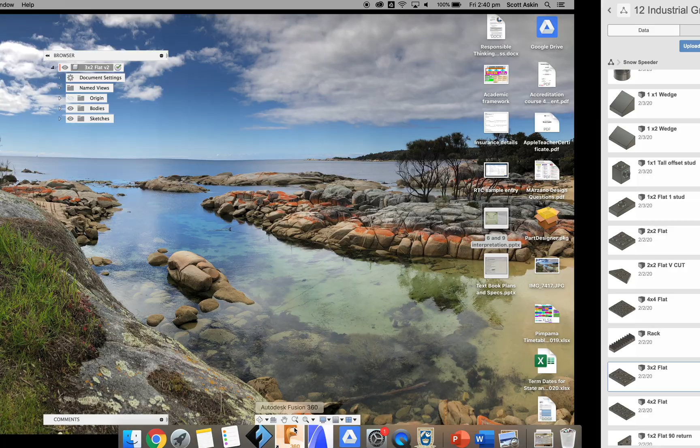In this tutorial I want to show you how you can convert this 3x2 flat into a 3x2 flat wing, or we might call it a 3x2 flat chamfer. The major difference between the two parts is that the chamfered part, which happens to be a wing for my device, doesn't have studs and also has this part cut off. There are a couple of ways you could go about doing this. You could use a lot of geometry, you could draw stuff, but I want to show you how to use the chamfer tool to create this shape in the wing here.

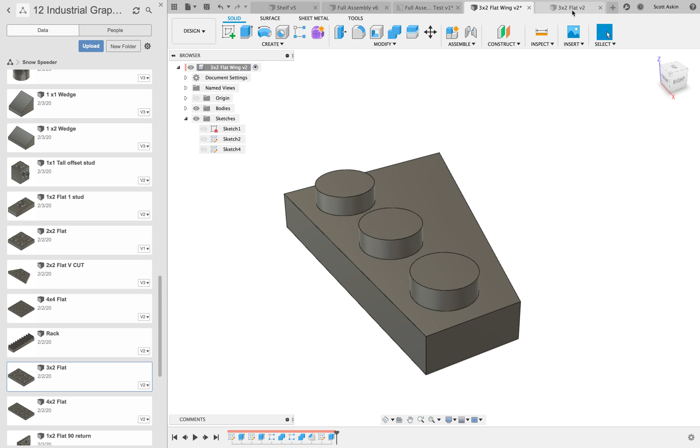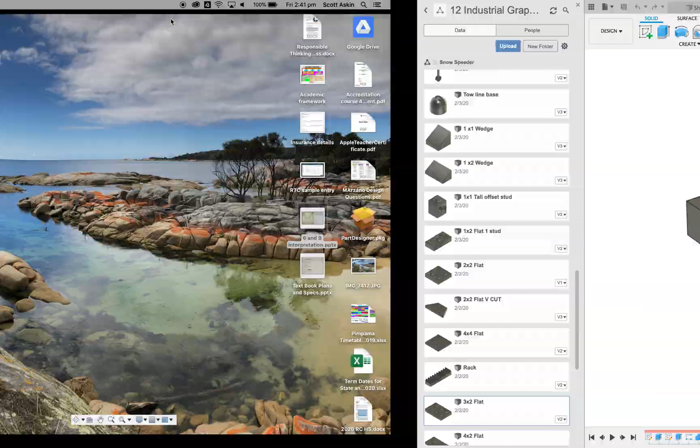I'm going to go back to my 3x2 flat, and this is the one I'm going to edit. The first thing to do is name the new file you want it to be. So File, Save As, and I'm going to call this a 3x2 flat chamfer. You can call it whatever you want for your actual device. Click on Save. I'll just quickly go back and refresh that. There it is, make sure it's the one I'm after, 3x2 flat chamfer. Good, I got the right file.

The first thing I'm going to do is apply a chamfer to one of these edges. If I click onto this edge here, the shortest edge, and highlight it, then come up to my Modify tools at the top, click on the Modify icon. Underneath fillet is the chamfer command. Click on chamfer, and it defaults to the edge you selected.

If that says 1, you can just select it as one edge. You can do more than one edge at a time if you wish by holding down the shift key. You could do 4 or even 5 if you wanted to. By grabbing that little arrow and pulling it in, you can apply a regular chamfer, which means it's moving the same distance along both axes. But that's not actually what we want. We don't want a regular chamfer, and we don't want it on all 4 edges.

So I'm just going to deselect those edges, go back and select the edge that I want. Rather than the chamfer type being equal distance, click on the black triangle and change it from equal to 2 distances. Once you've done that, you'll see 2 arrows appear. The 2 arrows allow you to pull the chamfer in 2 directions at different units, as you can see happening there.

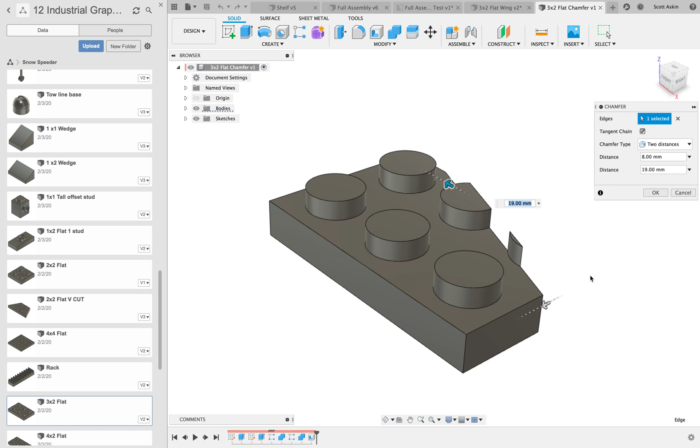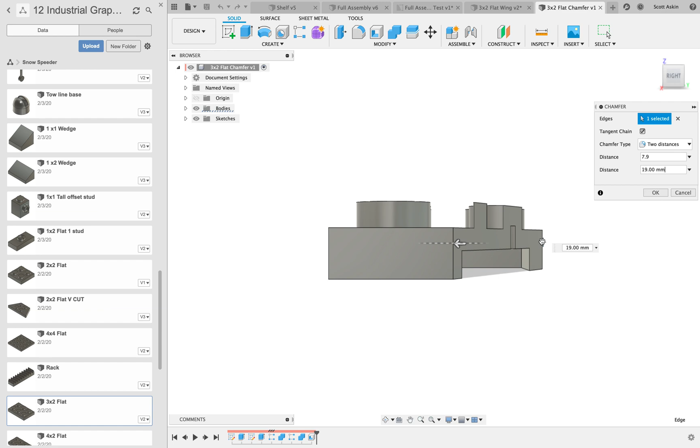So the trick here is working out how far to set that chamfer back from the corner. If I spin this around to the right view, the distance from this corner to this corner for a 1x1 piece is 7.9. So the distance I go from this corner back to here also has to be equal to 7.9. So type in 7.9 in that value, click onto the box below it, and the second distance equals that length of 7.9 times 3.

So we come to this distance, type in 7.9, shift asterisk and 3, and you'll see it takes it right to the corner. Now that may be what you're after, but I've also seen on some Lego pieces that they don't always chamfer right back to the corner. Sometimes there's a minute step back there as well, so it might actually look like that. It's up to you depending on what look you want to create. Remember, everything is a multiple of 7.9.

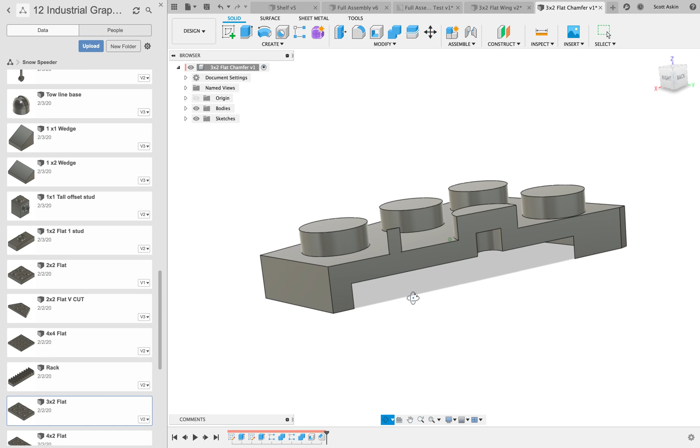So we click OK to the chamfer, but you can see we've still got these studs remaining here, and there's also this hollowed out section underneath. It depends on what you're trying to create. I might just leave the shell there for the moment and just try removing these studs and see what happens.

Realistically, the easiest way to remove these studs is just to cut them away by creating a sketch and then using an extrude cut. You could try turning extrusions on and off and all sorts of stuff, but the easiest way really is just to do a sketch. So I'm going to select a surface down here to put a sketch on, and I'm simply going to draw a rectangle to encompass the studs I want to cut away.

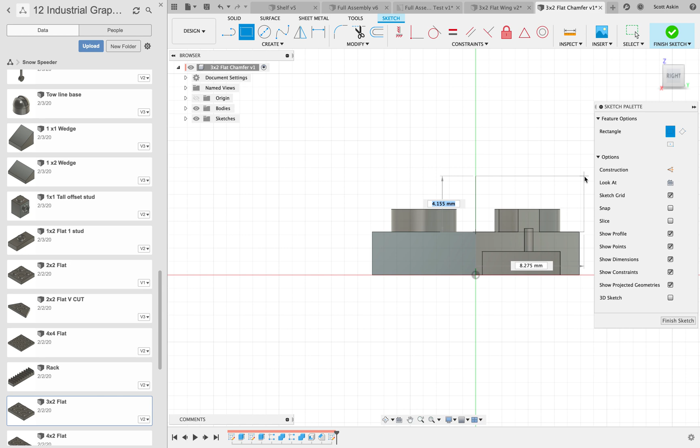Click on rectangle, it should snap to that point, hopefully. Yes, it does. Drag it away like so, it doesn't matter how big I make this. Finish the sketch, select that sketch, go to your extrude, and drag it so it cuts it away. It turns red for that cut. Make sure it says cut up here, which it does, and click OK.

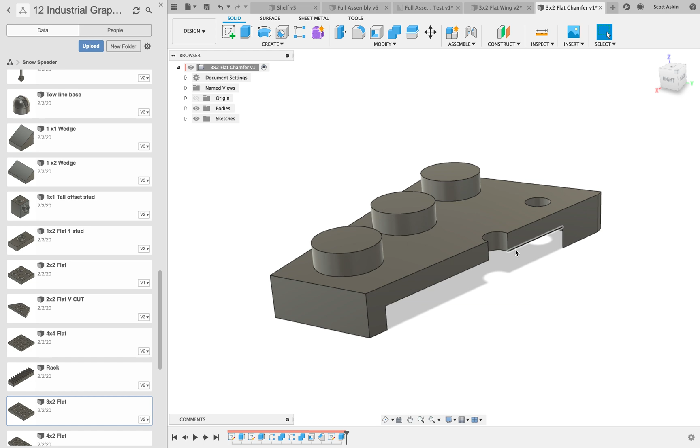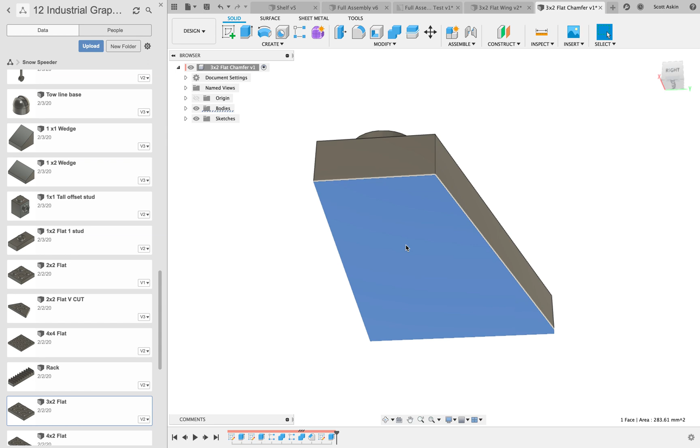Now you can see the little problem here, we've got these holes, and they're a result of the original shell. So we go down to the timeline, find the shell that we applied, select it, right click, delete, and you can see now it's filled back in. Then simply reapply the shell: flip it over, select the bottom surface, that's the surface you don't want included in the shell, click on the shell icon, 1.45, and happy days.

Okay, so that's using the chamfer tool, remembering that everything's a multiple of 7.9.